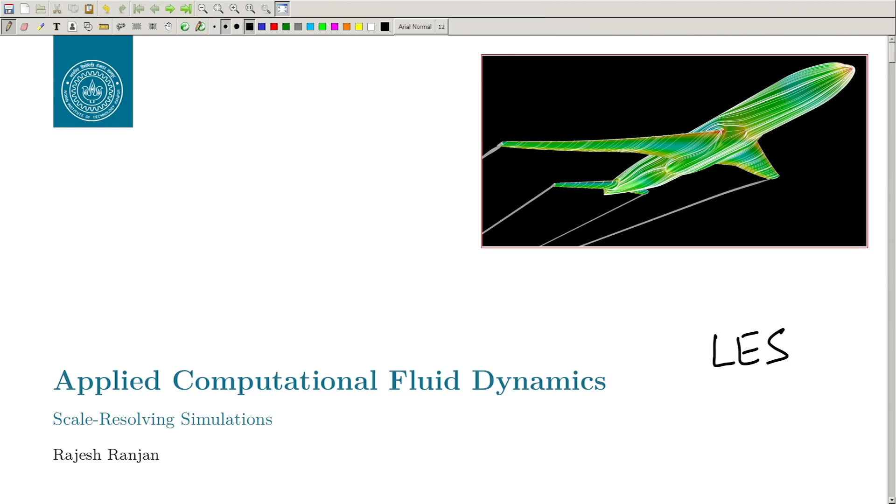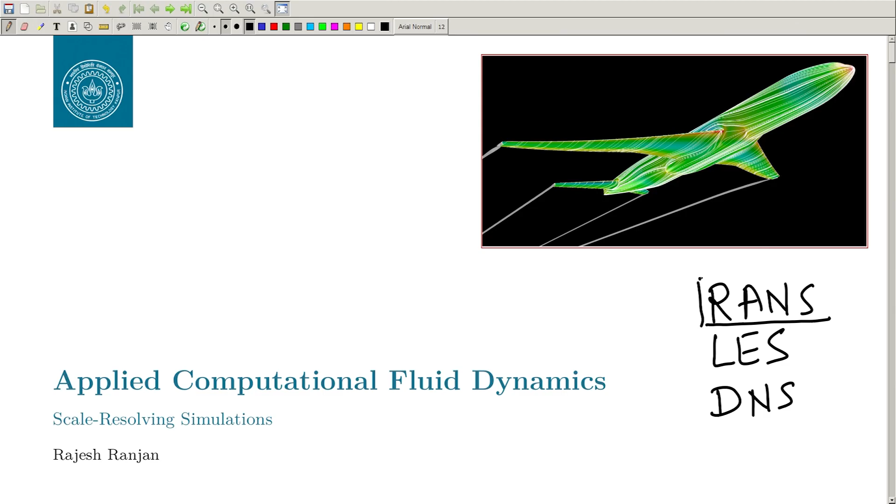For example, we have been discussing about large eddy simulation, which is LES, and also we have been discussing about direct numerical simulation, which is DNS. So we have primarily three methods of simulating a fluid. One is Reynolds Averaged Navier-Stokes, which we have studied a great deal about. In the next few lectures we are going to see how we can perform LES and DNS.

And what are the practical considerations when we are using or performing LES or DNS. One thing we have discussed so many times is that compared to RANS, LES and DNS are very expensive.

One primary reason is that in Reynolds Averaged Navier-Stokes equations, or in RANS simulations, we solve for the average quantity and we do not get the fluctuating quantity, we model the fluctuating quantity. So we can have different kinds of models, we can have the model which basically gives you the final output of turbulence kinetic energy, or the dissipation rate, or the specific dissipation rate.

So like we have K epsilon model, K omega model, SST K omega model, and then there are models which are based on stresses directly also, computation of stresses directly, which are the Reynolds stress models, which are not the eddy viscosity models. So because we are only interested in the mean flow, we need not go into the finer scales of finding out exact turbulence quantities, but if a statistical value of the turbulence quantity we get, that is good enough if we are doing for the mean flow.

On the other hand is DNS, which is direct numerical simulation, and as the name indicates, we are going to simulate the flow as it is, numerically. We are not going to employ any model, that is why it is called direct numerical simulation. And because we are simulating it directly, we need to resolve all the scales of the turbulent flow, and that is why it is very expensive.

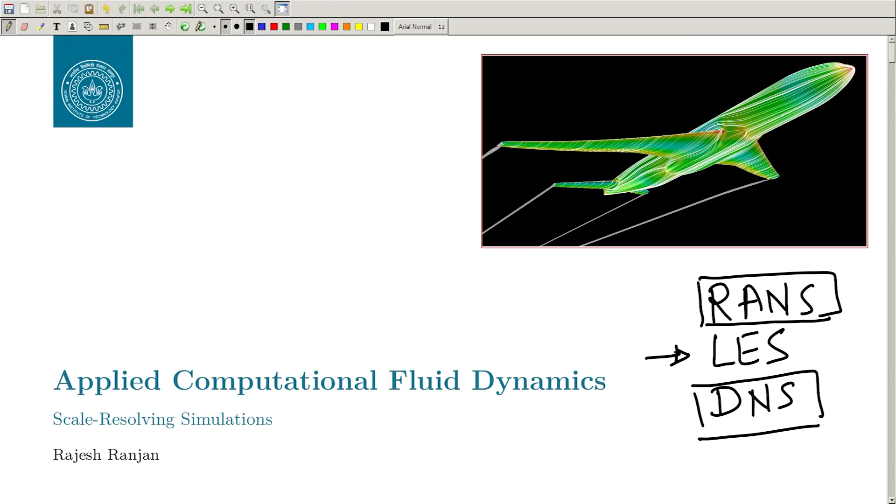And there are multiple versions of LES also, there are wall-modeled LES, there are very large LES. Then there are hybrid methods of doing LES, like hybrid RANS-LES approach, there is wall-modeled LES. So there are many variants of LES also. We will not go into those variants in great detail, but we would rather see what we mean when we perform LES. And once you have the physical picture of what we are trying to do using LES, based on your interest you can go and look into different kinds of LES models.

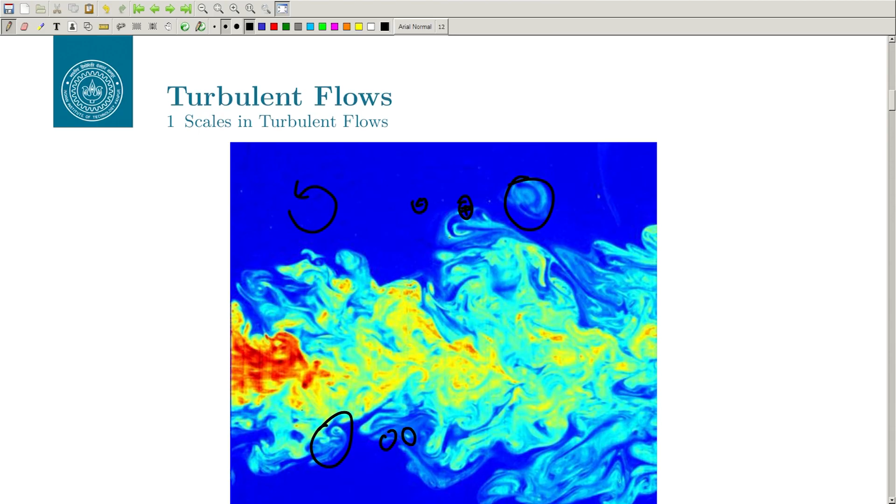So look at any turbulent flow, this is random, the turbulent flow is random, it is unorganized, and despite being random, it has got some kind of statistical properties. It is chaotic and it has got multiple scales.

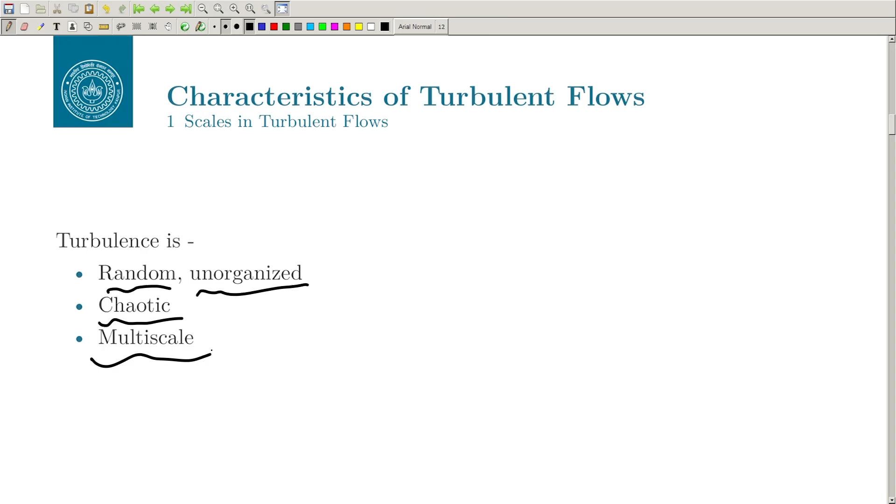So we can have very small scale to very large scale. Let us take the example of boundary layer. You can have something happening very close to the wall, and then something of a larger scale. Similarly, if you flow inside a channel, this is your large scale phenomena, and then you have something inside the boundary layer.

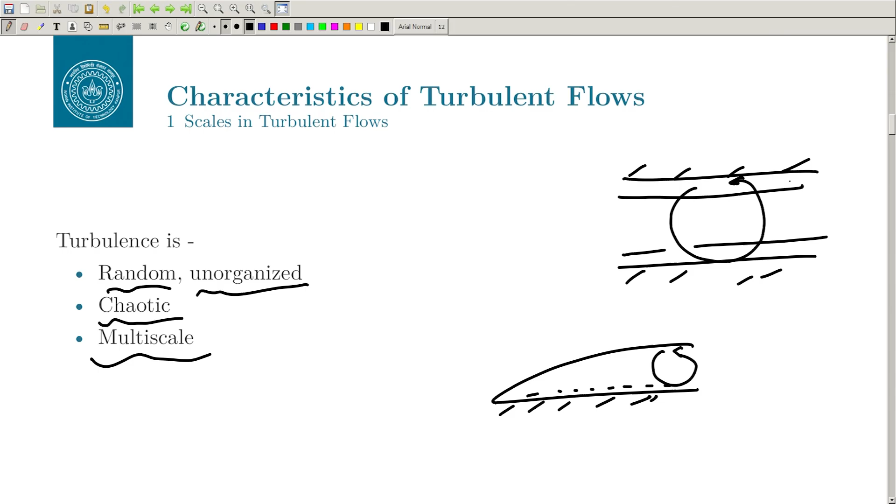If you talk in terms of atmospheric boundary layer, this is your big atmosphere. You have to basically resolve it, it can go up to kilometers, from the ground to the level where ground effects are not very important. So that domain can go up to kilometers. On the other hand, you can have few meters or centimeters very close to the boundary layer. So both phenomena are important.

So if you want to resolve this atmospheric boundary layer using a direct numerical simulation, you need to have a grid which is very small in size, which can capture the boundary layer very close to the earth, and can also capture the effects of the earth outside. This is one example we have seen earlier also.

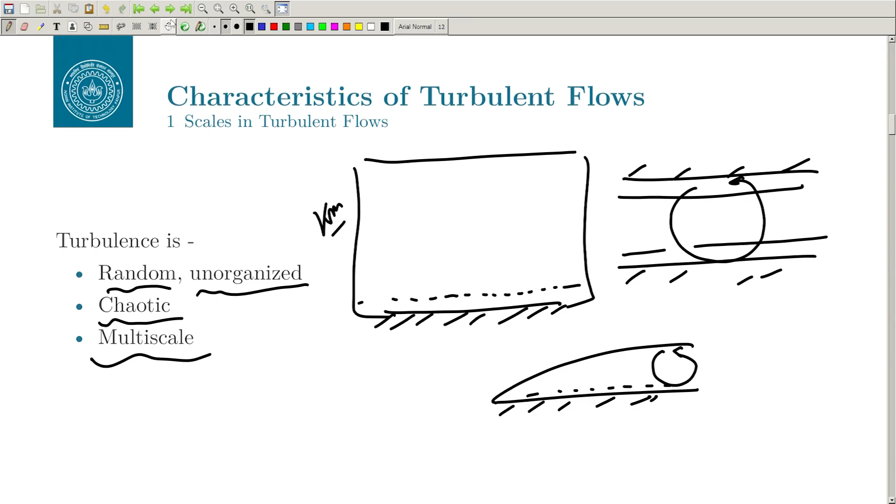We have got a mean flow, a typical picture of a turbulent flow, where you can divide any flow field into a mean flow and a fluctuating quantity. This mean flow imparts energy to the eddies, and you have large eddies and very small eddies.

Remember that famous Richardson poem, that the large eddies impart energy to the next level of eddies, and then they impart energy to the next one, and so on until they reach the smallest scale. When it reaches the smallest eddy, that is where the dissipation takes place. So it is an entire cascade from the very large eddies to very small eddies.

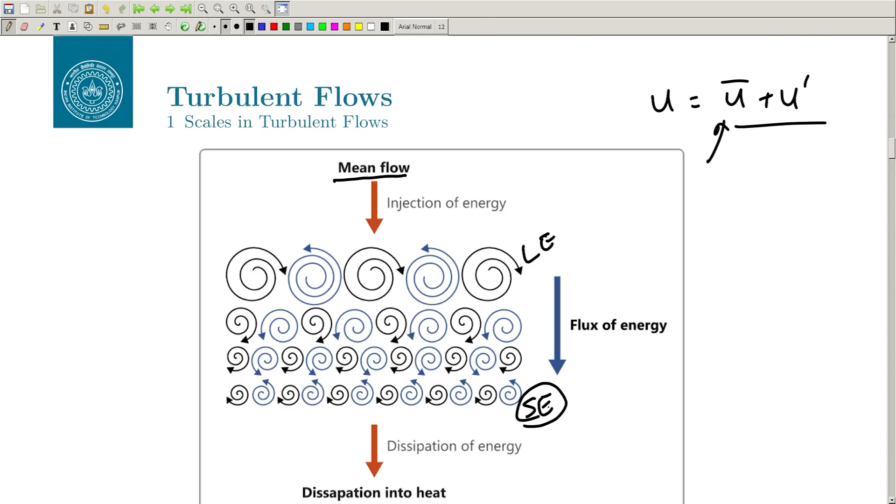Here what is important is the dissipation, because the viscosity plays a big role, and here what is important is the production, because these eddies get energy from the mean flow, and in between you have the transfer of energy.

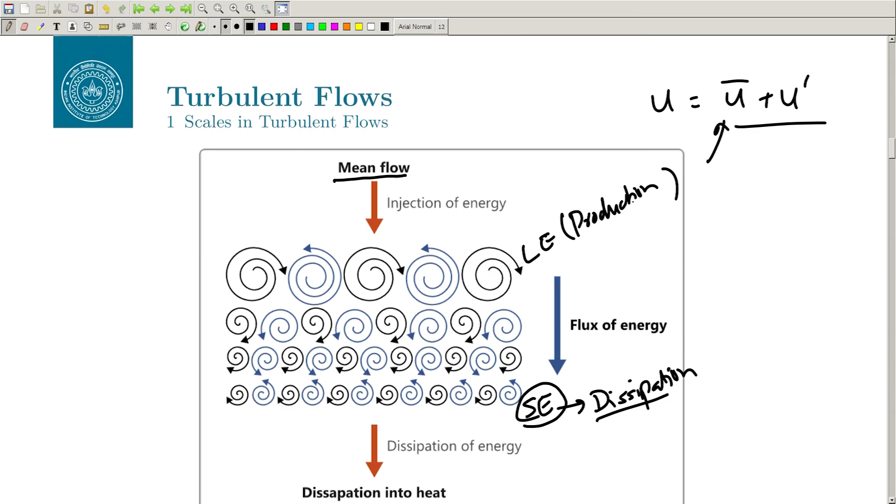The same thing if you see in terms of the energy cascade. What you see here is wave number, k is the wave number here, this is not the turbulence kinetic energy. This wave number can be related to the inverse of the eddy size. If you have an eddy size, typical eddy size whose length is L, then wave number could be written as 2 pi by L.

So if the wave number is increasing, then your eddy size is decreasing. This side, these are very large eddies, and this is basically small eddies.

Now what you see in the y axis is basically the turbulence kinetic energy density. It is not the kinetic energy, but the kinetic energy density. That means if you take the area under the curve, this entire thing will give you the entire kinetic energy, and this is plotted in the log scale.

Why is it plotted in log scale? So that you can find some slope here, and this slope has got some meaning. If you have attended any course in turbulence, you know that this slope is around -5/3, and so on. So when you plot in log scale, it will be a straight line.

So this is the large eddy and this is the smallest eddy, and you can see this large eddy is represented by length scale L and the smallest eddy is represented by length scale eta.

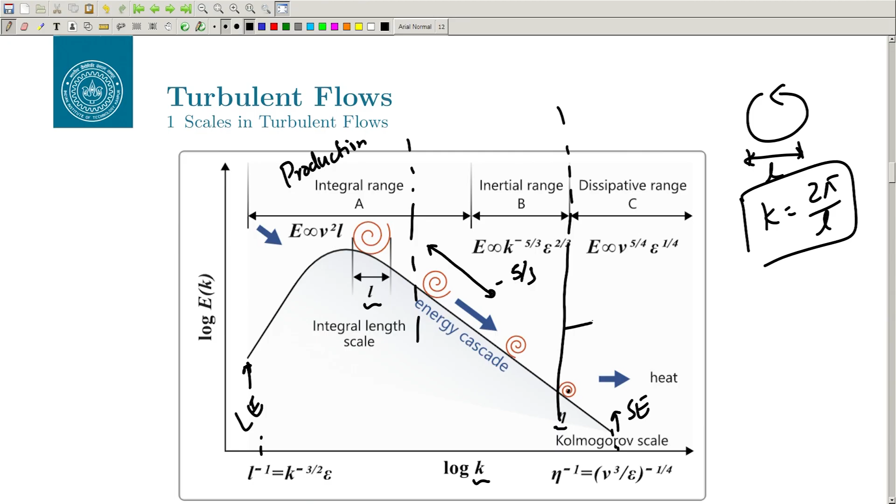What happens is that in this region, up to this point, the production is important, and after this the dissipation is important, and in between is the transfer of energy.

So, in the region where the production is important, the quantities that matter are your turbulence kinetic energy and the dissipation rate. And where there is dissipation of energy, what is important is your viscosity, because the dissipation is happening due to the viscosity, as well as the dissipation itself.

In between, where there is a transfer of energy, what is important is the length scale L and the dissipation of energy. Now, why are we discussing this in detail? This will come up again and again, because it is the crux of the matter which differentiates RANS from DNS and LES. In RANS, you will not see this diagram, because we do not segregate the turbulence kinetic energy based on the wave number or the eddy size.

We basically model it. I will call it TKE, because for turbulence kinetic energy we also use the same symbol as K, so to avoid confusion, let us call it TKE. In RANS simulations, we directly model TKE and do not segregate based on wave number. So we cannot get this picture, but what we can get is the entire integrated quantity of this diagram.

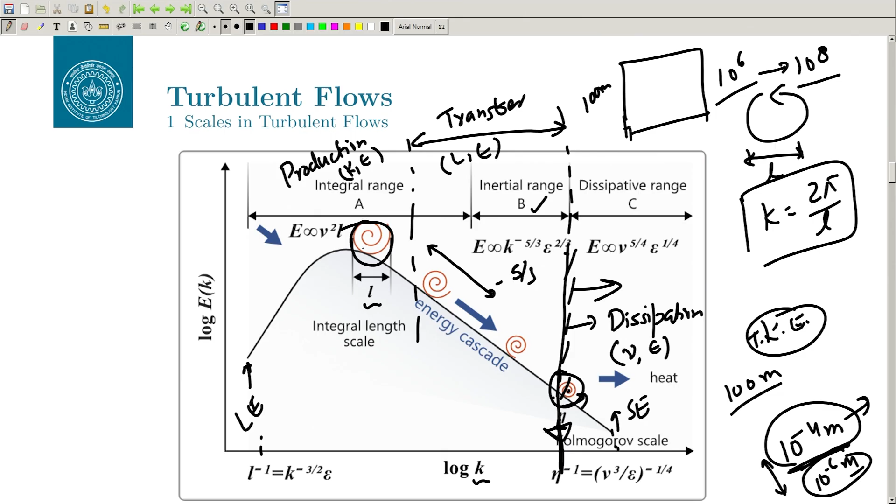So what are we going to do? We will define two eddies. If you go to the last picture, we will have the large eddy here, and we have the very small eddy. We will take these two eddies and say that production is happening with the large eddies and dissipation is happening at the smallest eddy, and they will make some connection between the two and try to find out one number for the average grid size.

So I am defining the largest eddy with length scale L, and it has a velocity scale which is u. For the smallest scale, the smallest eddies responsible for dissipation, we take the length scale as eta, and the velocity scale as v.

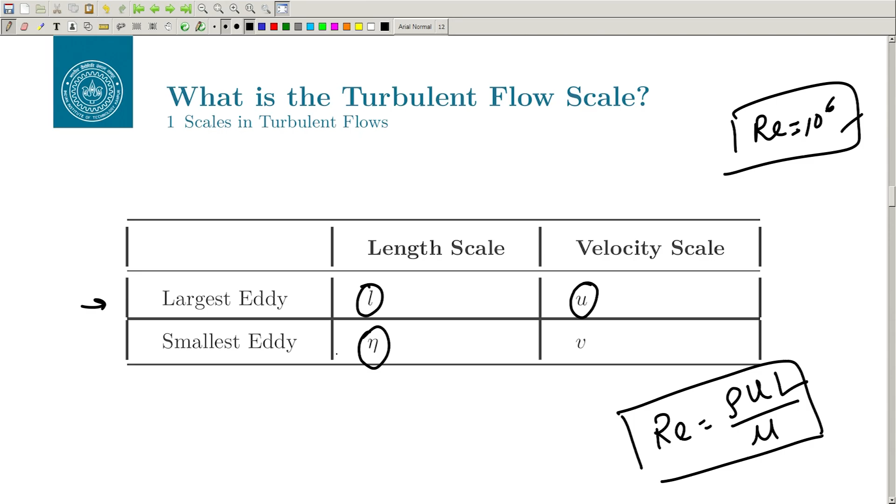Now we are going to look at the two extremes of the spectrum. One is production, where energy is taken by the largest scale from the mean flow, and the other is dissipation, which happens due to the smallest eddies. So this is my diagram, E(k) versus k, on a log scale.

So time scale will be length by velocity — length is meter, velocity meter per second — that gives you seconds. So this will be of order u square by (L by U), which is basically U cubed by L. So this is what is written here.

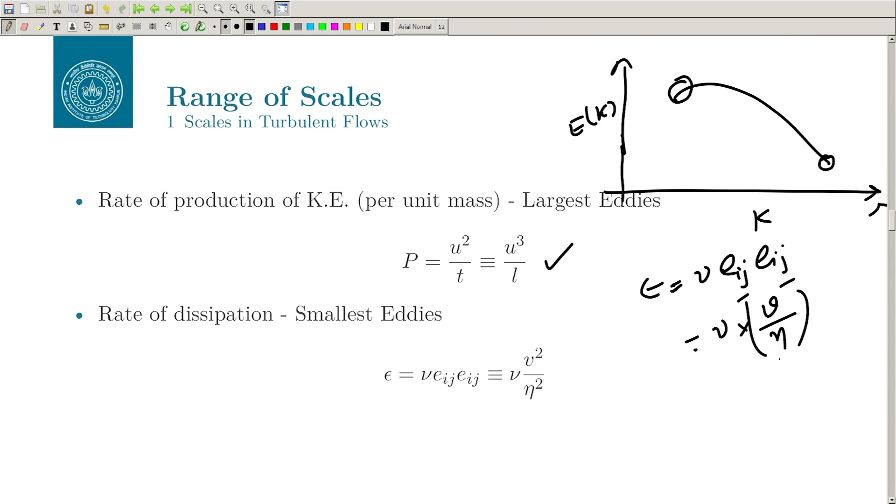So if you go by a dimensionality argument, this will be nu, which is viscosity, and what is the velocity gradient for the smallest scale? We have the velocity scale small v, and length scale eta, so that gives v by eta, v into v by eta. Do not get confused — nu is like this and v is like this. So that will be squared, giving nu v square by eta square. So that is the rate of dissipation.

Now, Kolmogorov made two assumptions, and those are very fair assumptions. One is that at any time, in equilibrium for turbulent flow, the rate of production of kinetic energy is equivalent or similar to the rate of dissipation. So basically production is like dissipation. So you can say U cubed by L, which we derived here, is equal to nu v square by eta square.

Remember what we started with: we want to find the smallest scale we need to resolve based on a given condition, say the Reynolds number. But this does not give enough information by itself. It relates the largest eddy to the smallest eddy.

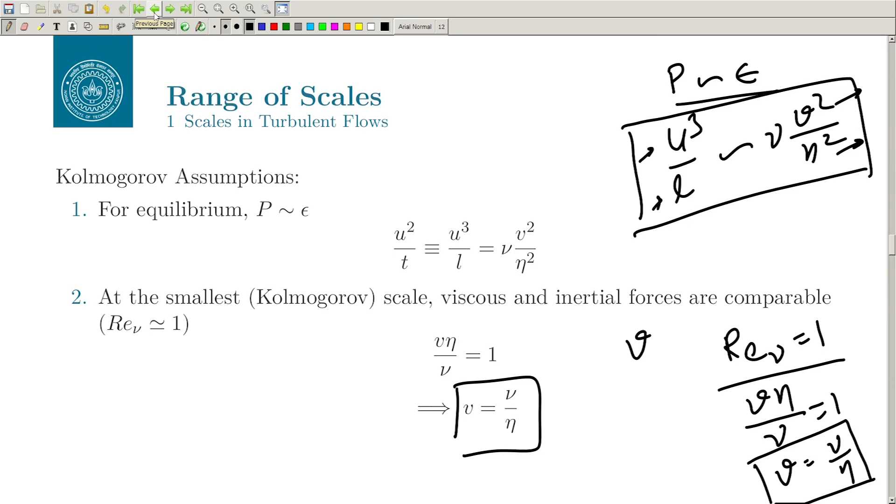Now using this second assumption, v equals nu by eta, we know the dissipation rate. What is the dissipation rate? It is nu v square by eta square.

Using that argument, epsilon equals nu v square by eta square, and we discussed that v equals nu by eta. So we replace v: epsilon becomes nu times (nu by eta) squared by eta square, which becomes nu cubed by eta to the power 4.

So epsilon is nu cubed by eta to the power 4, and from that we find eta equals (nu cubed by epsilon) to the power 1 by 4. This is basically the smallest eddy size we want to resolve, related to viscosity, but there is another parameter, the dissipation rate, which is not easy to find out.

So now we will use the first assumption as well: that production is basically similar to dissipation. So u cubed by L equals nu v square by eta square. Replacing v with nu by eta, this becomes nu cubed by eta to the power 4.

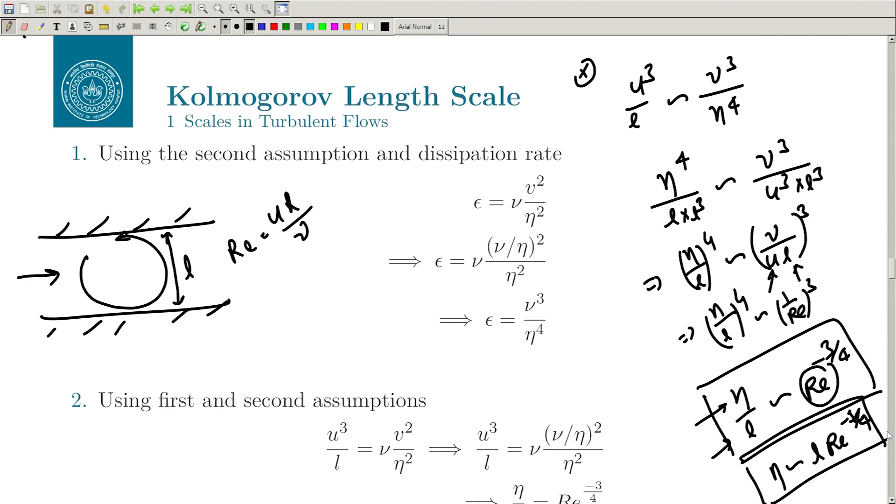In the next class we will see some examples of what grid size we get for different Reynolds numbers when we want to resolve the smallest scale to the largest scale. We will stop here. Thank you.